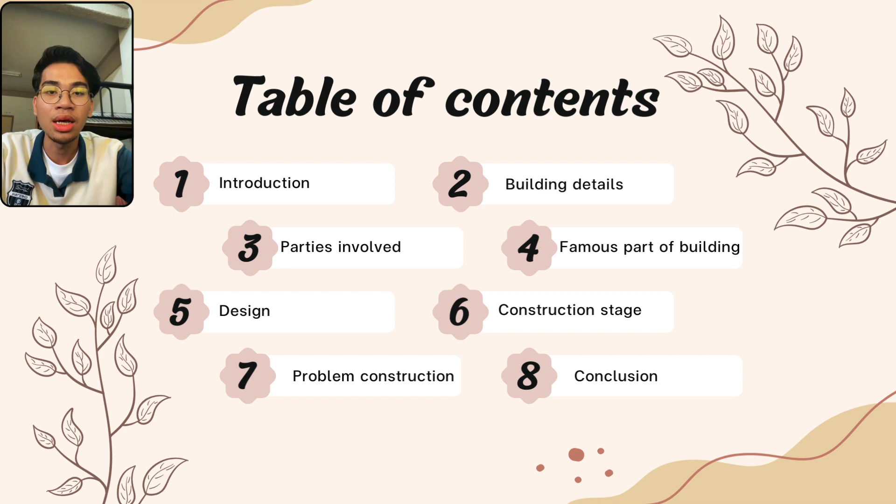For your information, our group chose the National Mosque of Malaysia, which is Masjid Negara, as our assignment. So here we can see the table of contents of Masjid Negara. Our group will present to you from the introduction until the conclusion about Masjid Negara. So we hope that you will enjoy our presentation.

Assalamualaikum, my name is Nur Aina Suhaila binti Jamali. I will present the introduction of the National Mosque. The National Mosque is the main mosque in Malaysia, located in the heart of the city of Kuala Lumpur. This mosque was constructed in 1963 and officially opened on August 27, 1965. However, the idea to construct this mosque started 1 month before Independence Day. This is because it is the most symbolic representation of Islam's majesty as Malaysia's national religion.

Assalamualaikum and hi, my name is Muhammad Amir Hasif bin Ahmad Ghazi and I will present about the National Mosque of Malaysia. During a meeting of the Federal Executive Council on 30 July 1957, our Prime Minister Tunku Abdul Rahman Putra Al-Haj brought up the possibility of constructing Masjid Negara for the first time.

In our research, we have found that construction of the National Mosque of Malaysia started in 1963. It only took 2 years to finish the construction, which means it finished in 1965. The mosque was officially opened in August 1965 and declared by our third Yang di-Pertuan Agong. In addition, RM10 million in total was needed to finish the construction of Masjid Negara. I think that's all from me.

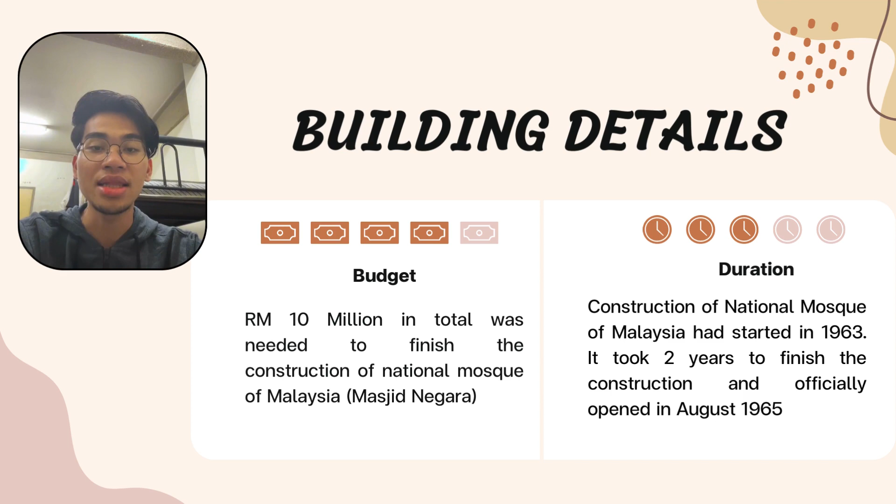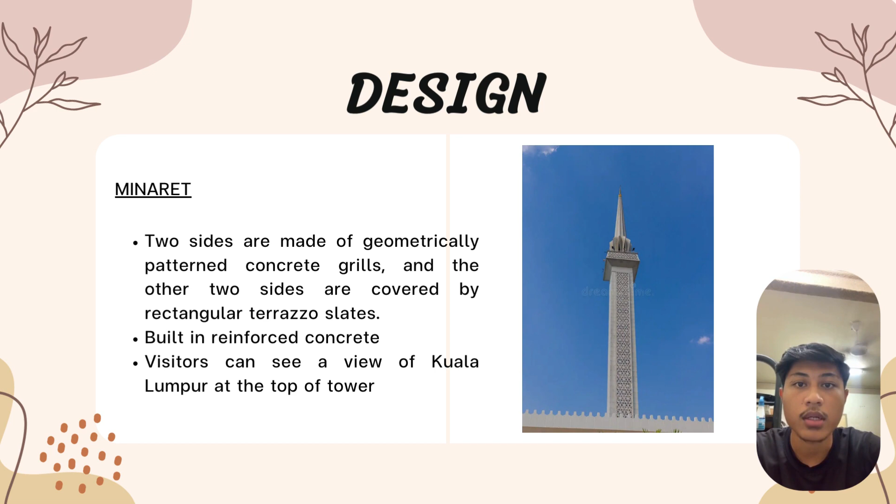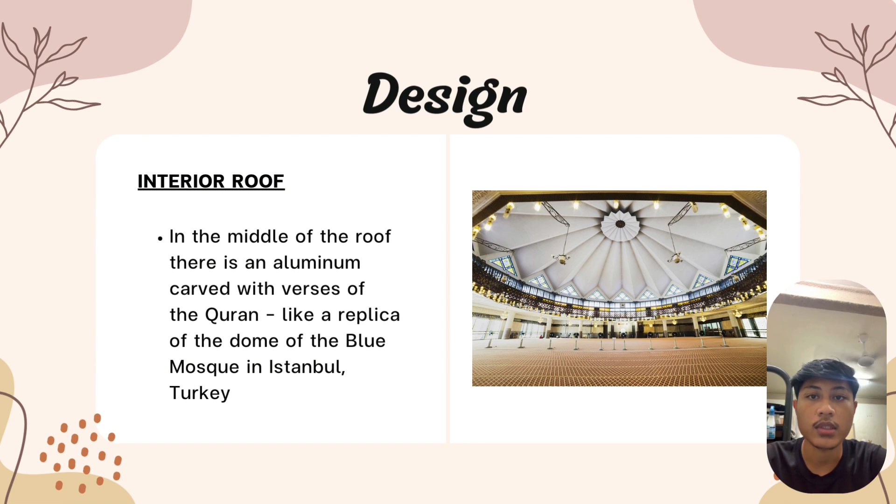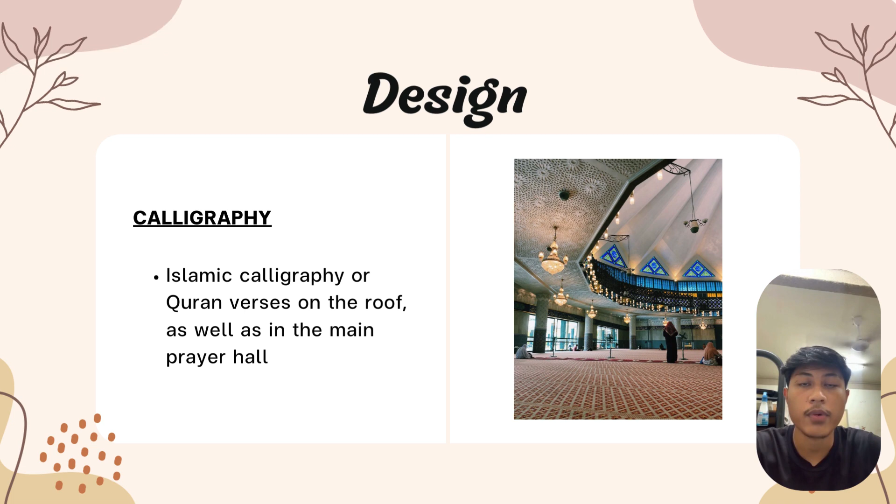Next, I will be explaining the design of the interior roof. In the middle of the roof, there is an aluminium carved with verses of the Quran like a replica of the dome of the Blue Mosque in Istanbul, Turkey. Furthermore, Islamic calligraphy or Quran verses were used on the roof as well as in the main prayer hall. Next, construction stage. First, preparing the site. It must be complete, including leveling the site, clearing the site, demolishing the previous structure, installing a water system and also determining the Qibla direction.

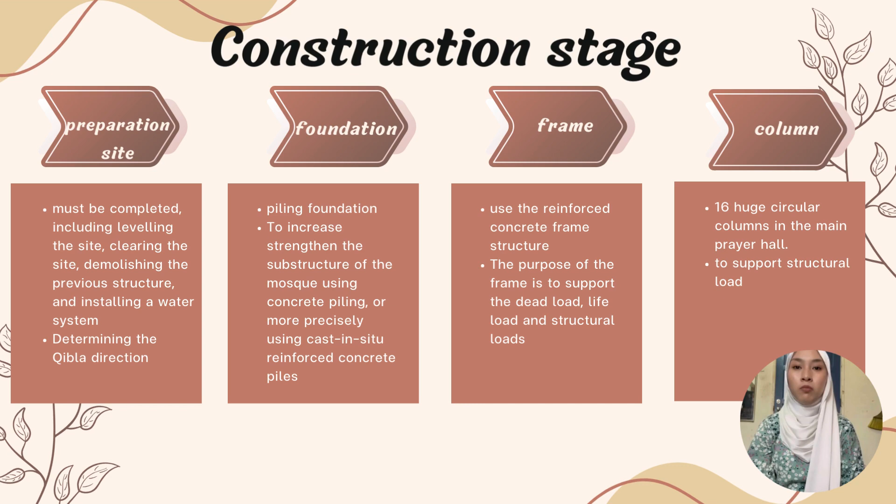Second, foundation. This mosque uses a piling foundation to increase the strength of the substructure, using concrete piling, or more precisely cast in situ reinforced concrete piles. Third, frame. This mosque uses a reinforced concrete frame structure. The purpose of the frame is to support the dead load, live load and structural load. Fourth, column. This mosque has 16 huge circular columns in the main prayer hall. The function of the columns is to support structural load. Fifth, staircase. Staircase is an important element that functions as a way of moving from one level to another level. It must follow the standard that has been set.

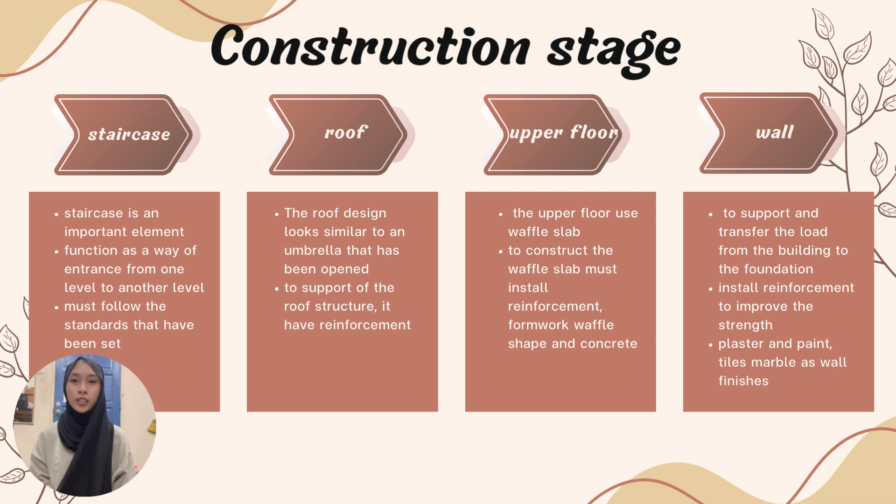Next is the roof. The roof design looks similar to an umbrella that has been opened. To support the roof structure, it has reinforcement. Next, upper floor. The upper floor uses a waffle slab. To construct the waffle slab, you must install reinforcement, formwork, waffle shape and concrete. Lastly, wall. The function of the wall is to support and transfer the load from the building to the foundation. Reinforcement is also installed to improve the strength. For wall finishes, tile, marble, plaster and paint are used.

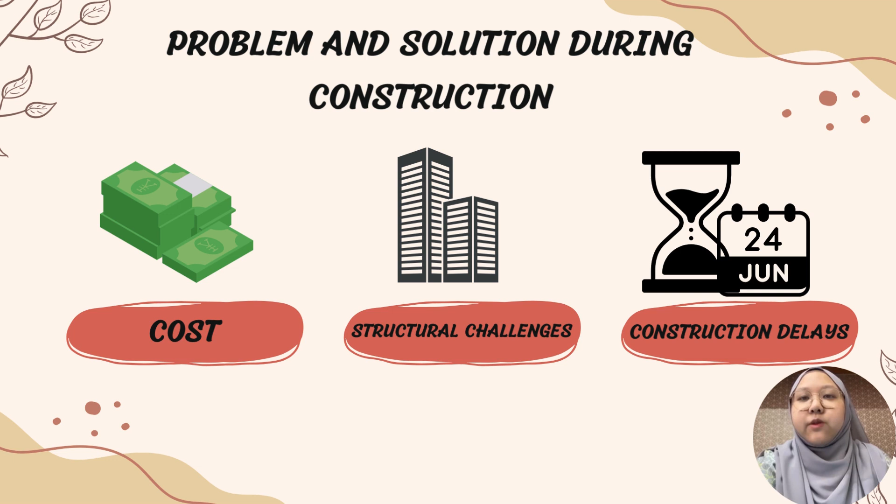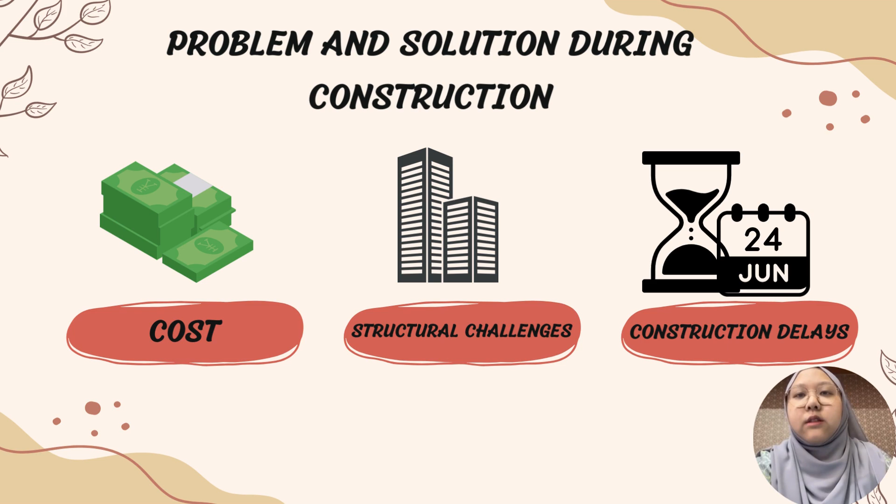Assalamualaikum and hi. My name is Alia Amira and now I would like to share with you guys the problems faced during the construction of the National Mosque and ways to solve them. The construction industry is an important industry in the development of the country because it is one of the main sources of the country's profit. However, the construction process is often full of various challenges that can affect the duration of construction, budget, and the overall success of the project. There are three problems and solutions during the construction of the National Mosque, which are cost, structural challenge, and the last one was construction delay. The first one is cost.

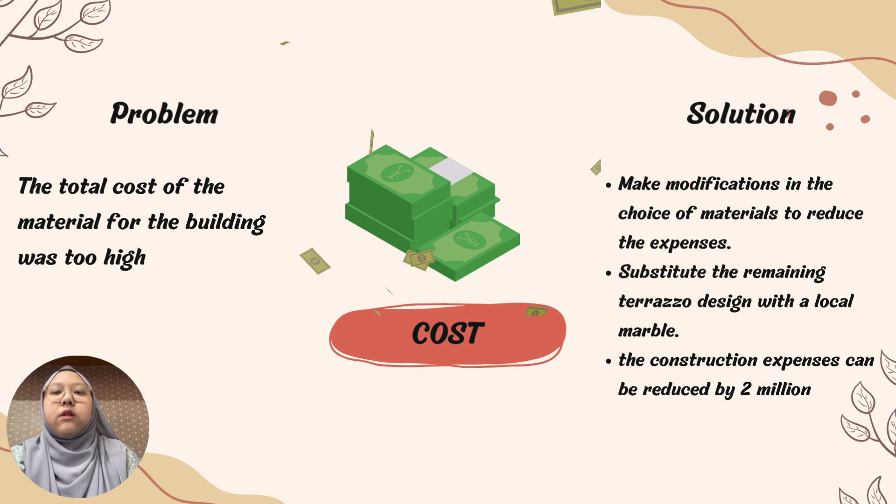The total cost of the material for the building was too high. The overall cost of the construction materials exceeded the expected estimated cost. It was necessary to make modifications in the choice of materials to reduce the expenses. Following their discussion, a decision was reached to substitute the remaining terrazzo design with local marble. By changing the material, the construction expenses could be reduced by 2 million. This not only saves construction cost, but the materials used are still high quality. Next, we have structural challenge.

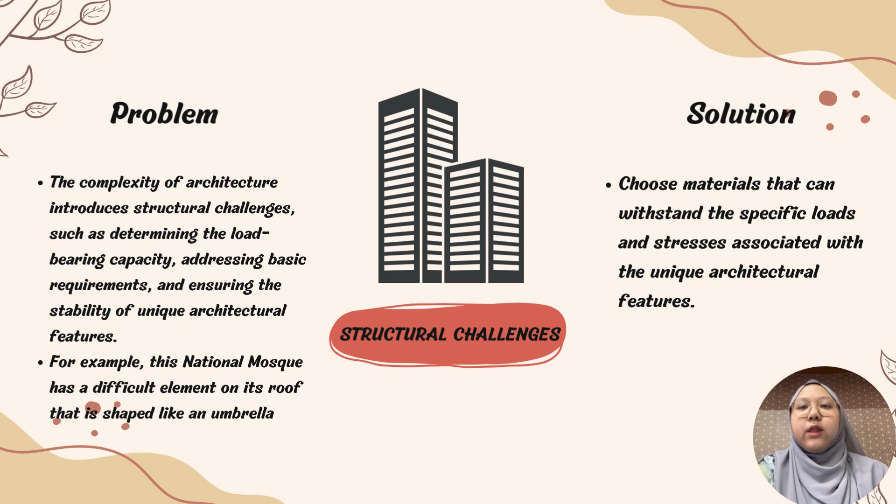The complexity of the architecture introduced structural challenges such as determining the load bearing capacity, addressing basic requirements, and ensuring the stability of unique architectural features. For example, this national mosque has a difficult element on its roof that is shaped like an umbrella. Meeting this challenge requires collaboration between architects and structural engineers. So, for the solution, the authorities chose materials that can withstand the specific loads and stresses associated with the unique architectural feature. And the last one is construction delay.

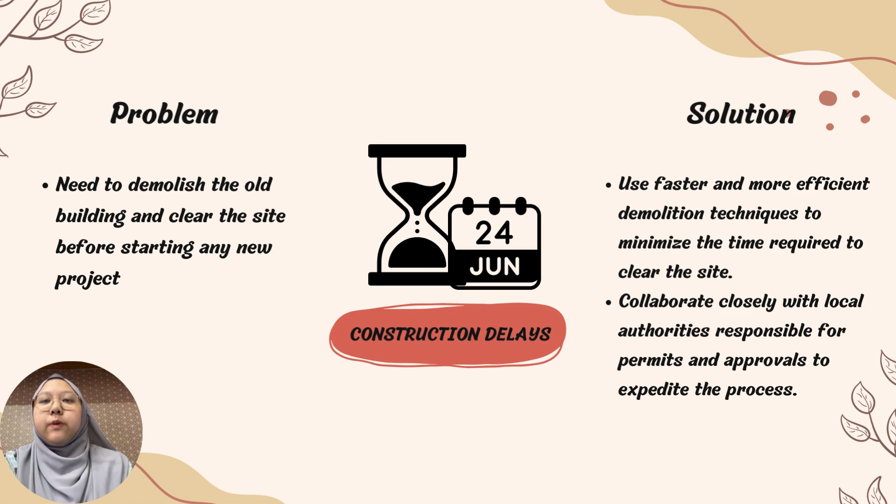This delay was because the authorities needed to demolish the old building and clear the site before starting any new project. For the solution, they used faster and more efficient demolition techniques to minimize the time required to clear the site. They also collaborated closely with local authorities responsible for permits and approval to expedite the process.

In conclusion, reinforced concrete proved to be a versatile and important material for constructing a variety of structures and parts, especially when considering the building of national mosques. Its strength and versatility make it a popular option for superstructure as well as substructure, helping to build iconic and long-lasting religious structures. The fact that the national mosque is made of reinforced concrete emphasizes how well suited this material is to support the elaborate architectural layout and symbolic features that are frequently connected to this imposing construction.